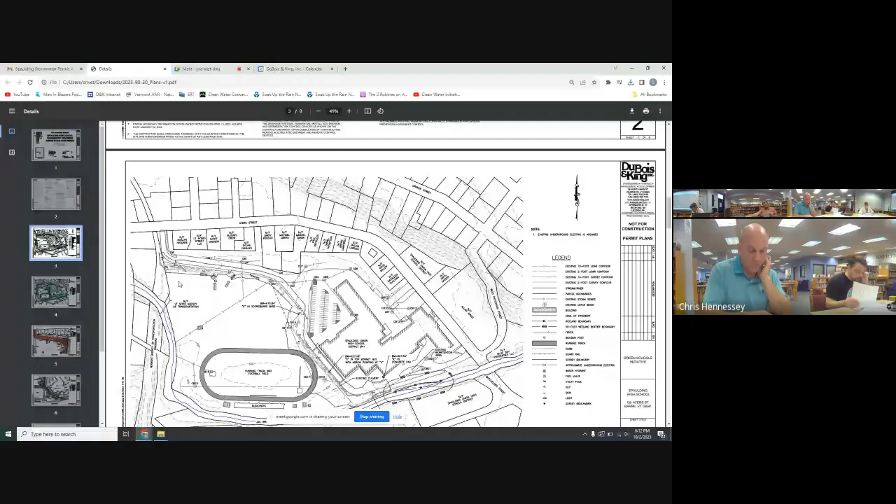So if you go from roughly where that catch basin 3 is, that general location, all the way down Crimson Tide Drive where it leads you towards Ayers Street, at one point that swale was going to follow that fence line. That swale no longer needs to be there because of where catch basin 3 is; that catch basin will travel across that area. So it's more serviceable area that the students will now have for additional practice area until we do the renovation of the ball field someday.

And then you mentioned that the fence is going away, and that also includes that fence.

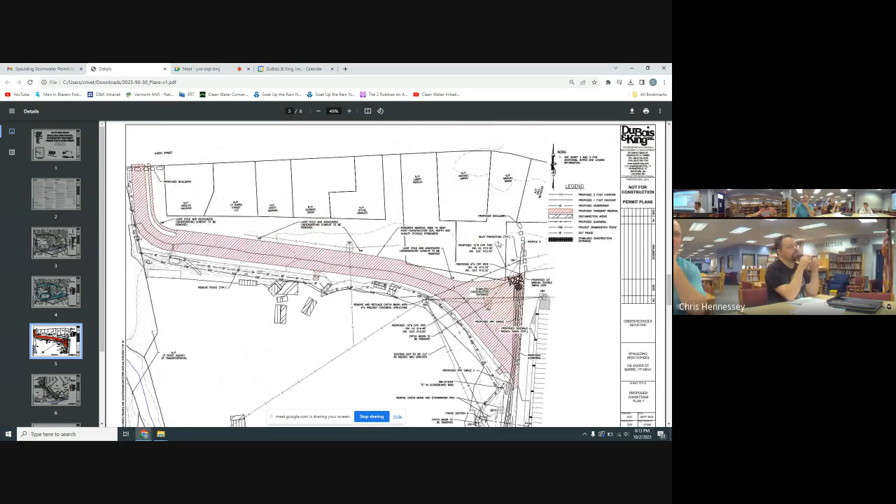Granite boulders? That's what Jamie was talking about. That'll be up to you guys for what you want, but it sounded like the quarry was open to giving you guys some material.

We can just do a train heist, as it's going by. There you go. Good strategic derailment.

As Jamie mentioned, we're still removing this catch basin 3 here where my mouse is. The one thing I did do was actually realign a new pipe in there.

These are all older RCP pipes, so there's going to be some disturbance to them. So I'm more inclined to redo it with some HDPE polyethylene pipe. We did that, and then we did catch basin 7 up here on the northern section of the parking lot. That one is actually piped to catch basin 3 now.

That one's going to be directed over to catch basin 2, which we are going to replace because of the new piping configurations.

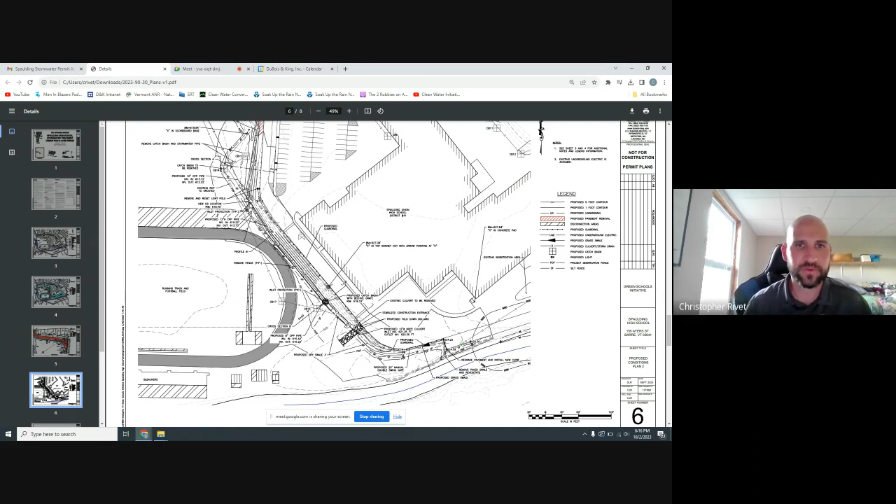In this case, what we're going to do is this beehive grate that we're proposing, that's going to stay. And then we're going to have essentially two - one here to tie in with catch basin 16, and one to catch basin 15R. There'll be a drain pipe underneath the swale itself, similar to what the under drain would have done. It's going to go right under the swale from one to the other.

Let's see. Because the fence is coming out, we extended the guardrail all the way along the road here to the existing entrance to the football field. We're going to open that up with just a regular walkway opening with a couple of bollards.

We discussed using those as fold-down, so you can essentially take a pin out and the whole bollard would fold down, allowing for emergency access if an ambulance needed to get onto the field. It's wide enough that probably two would be needed to keep a spacing so a car can't go through, so we had two proposed in there.

We continued the guardrail all the way around the corner and up to the existing parking spaces, with the exception of a swing gate for plowing access, so you guys can still plow and keep your maintenance operations pretty much the same in the winter time.

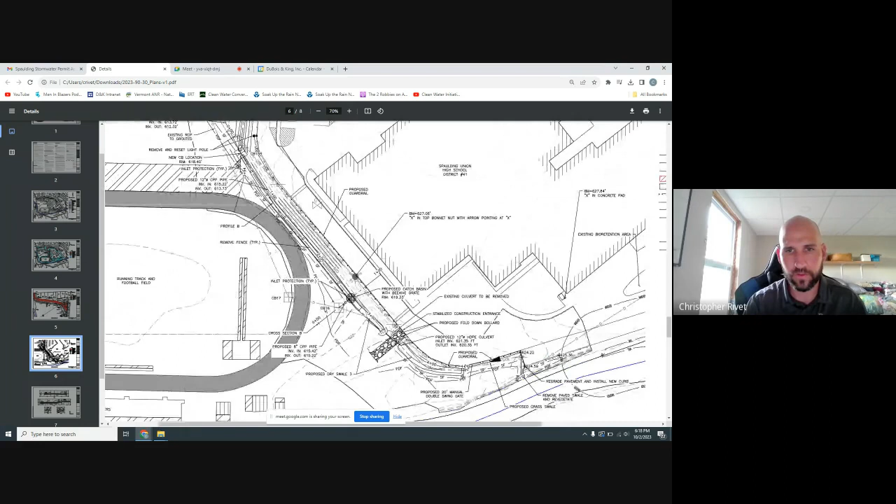I think that was it. Oh, going back to this area where we're keeping this access, it's also going to have a similar swing type gate.

We spoke about having some boulders up above that swing gate, going along the grass there. We showed some boulders here along this way so that cars won't be able to drive out and around the gate to get on the field and tear it up or anything.

But it will allow for your maintenance operations, getting your tractors on there, and if need be, any emergency access.

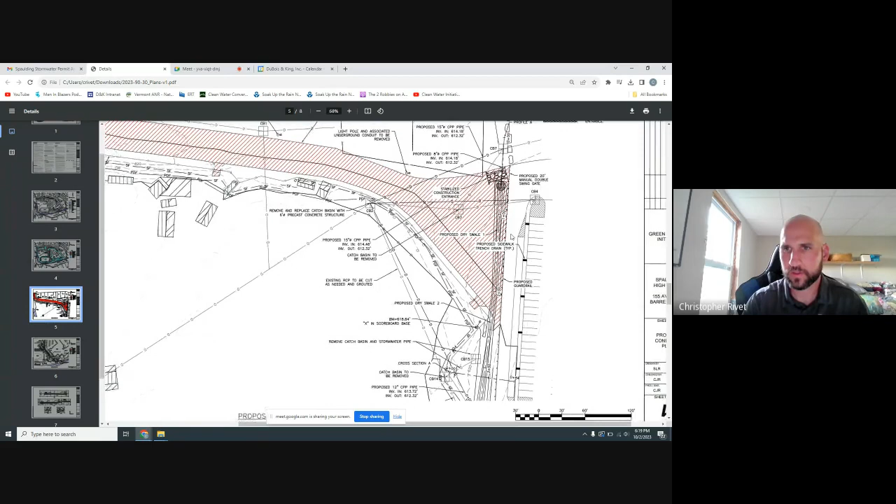Questions? Chris, when will you be able to share an opinion of probable cost now that these changes have been put on paper?

I'm going to put that together shortly. My focus last week was just trying to get the permit application done and getting that in hopefully this week. Jamie, I know you mentioned in your email that you think the school board has to approve this as well, and I don't know when they meet next, so hopefully that's soon. But if it's next week or whatever, I can get the opinion of costs done this week. October 11th, so it's the middle of next week, Chris. Okay, we'll get the opinion of cost done before then, or in the next couple days.

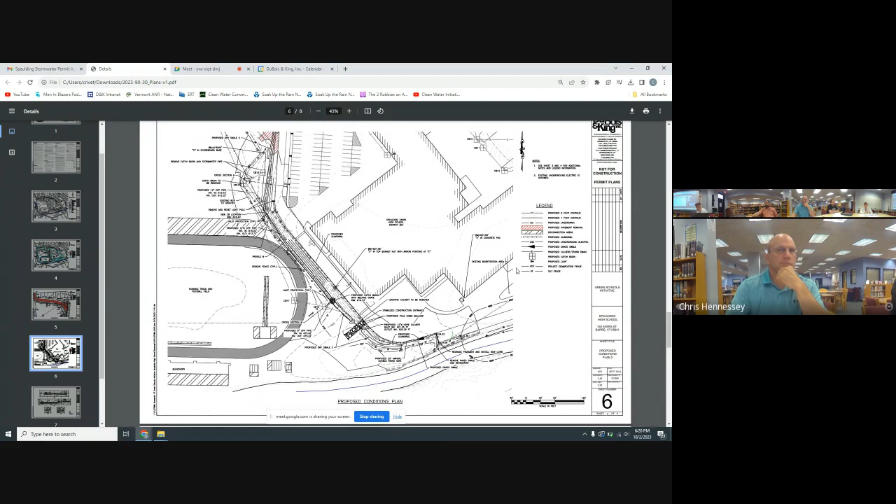I was trying to make sure you had a copy of the application for today, so that it can be approved and move forward. Am I correct that the facility committee needs to approve it to then forward it to the board? That's my understanding. They don't necessarily approve it, but recommend approval.

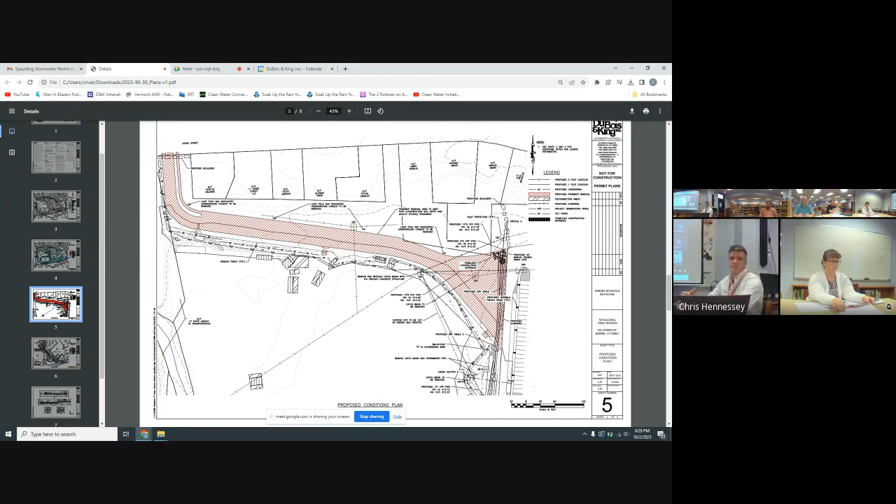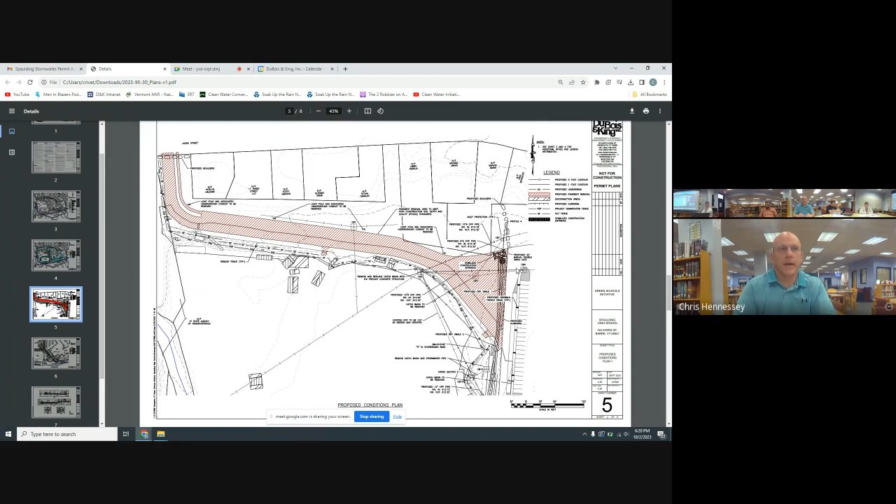I think really the changes that were made since this was last presented to the committee, in my opinion, if anything, it's been even another improvement to what we had before. Removing more fencing, installing less swale, and less swale being in the area of the ball field area. I think it's just gotten better and better each time. The under drain removal will be a nice savings as well, because that's a foot or two less of excavation across all those swales, along with the piping and the stone required. So yeah, I think that's a nice removal as well.

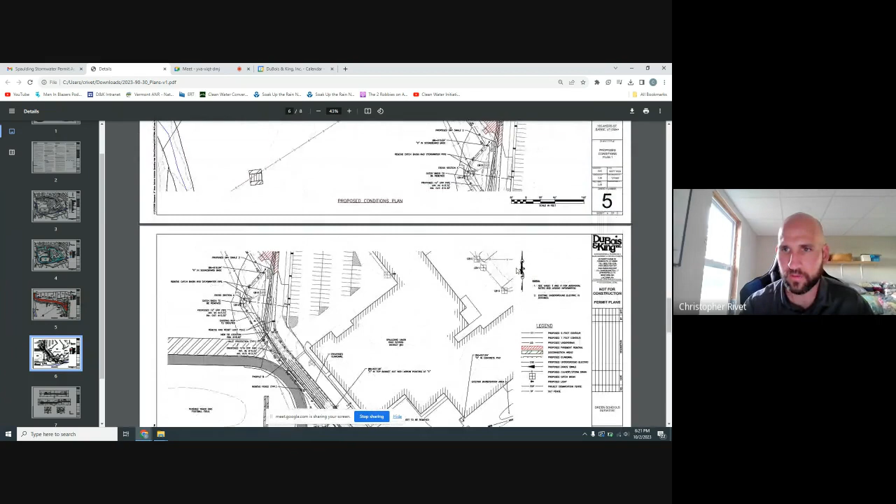The only thing I'll really have to dig into in terms of getting the cost is some of those boulders, just having to come up with something for that. We've got a project down in New Hampshire that we just did something with these types of boulders, so I'll have to look and see what happened there.

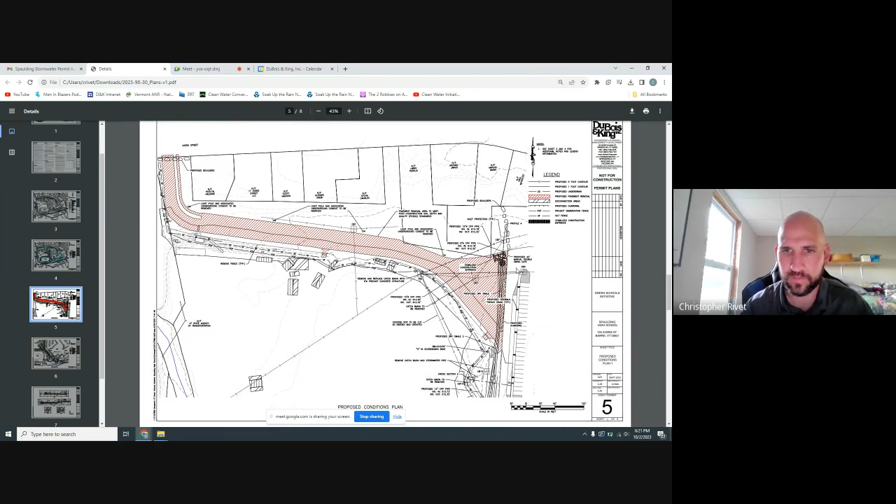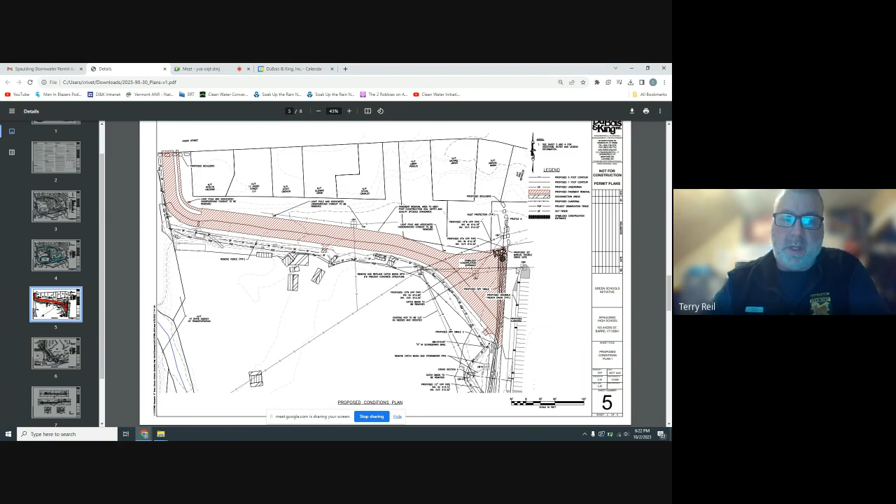We've got a question for you, Chris. Well, not so much for Chris, but maybe for Jamie and Chris Hennessy. So what are we recommending to the board, that we approve this to move forward with permitting, correct? Yes, that's right. Okay, so I would make that motion then, that we recommend to the full board to approve this design submitted by DuBois & King for permitting to the full board.

Second. So Terry with the motion, Ben with the second. Any discussion? All in favor? Aye. Opposed? All right, thank you. Very good.